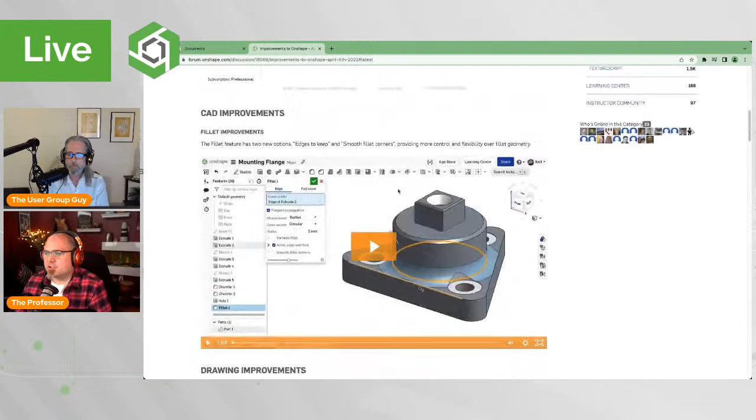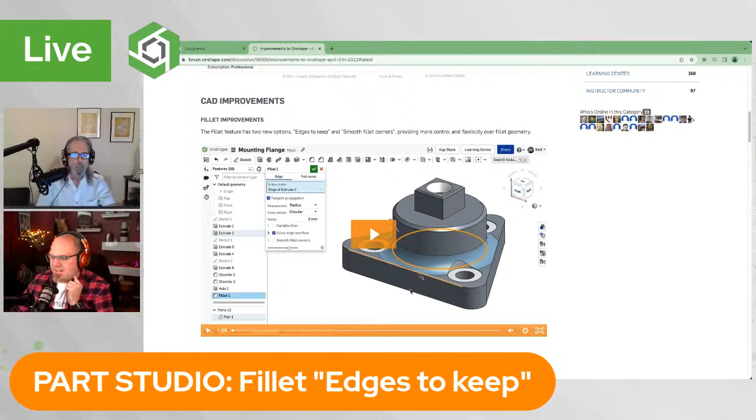There are two fillet improvements, not just one, but two fillet improvements in this release in our Part Studio. The first one is deciding which edges you want to keep in the event that your fillet falls off the edge. Like, if I zoom in over here and point where the mouse cursor is pointing, you can see kind of that little ledge popping up on front of Neil's part here.

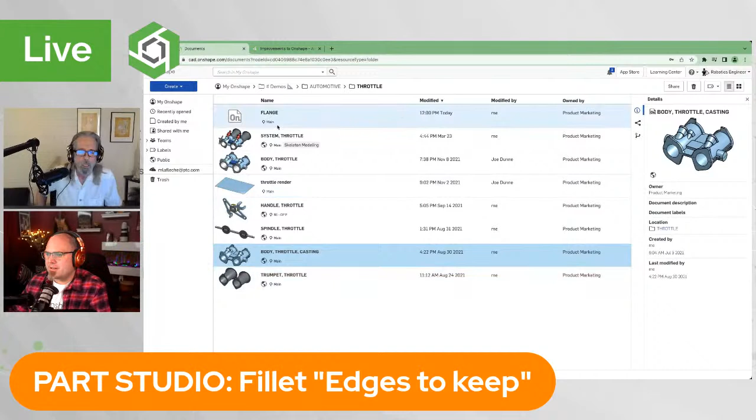And I can actually try to do this live, that way we can explain it just a little bit more. So here's my Onshape window, and I'm just going to create a very rapid flange here.

While you're doing that, Michael, there's a question in the comments: is there a limit on the number of subfolders? Not that I know of—I mean, you saw 19 there or something. I'd say it's limited by your sanity. It's something we can check on, but I guess don't do more than 20. If it's limited by sanity, I guess 2 subfolders is enough for me.

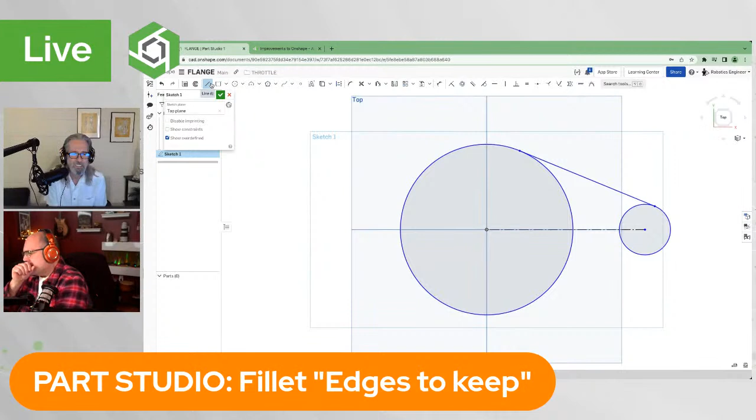Excuse me, it's like the first time I'm drawing in a CAD system here. Just give me a second. There we are, get it nice and trimmed up.

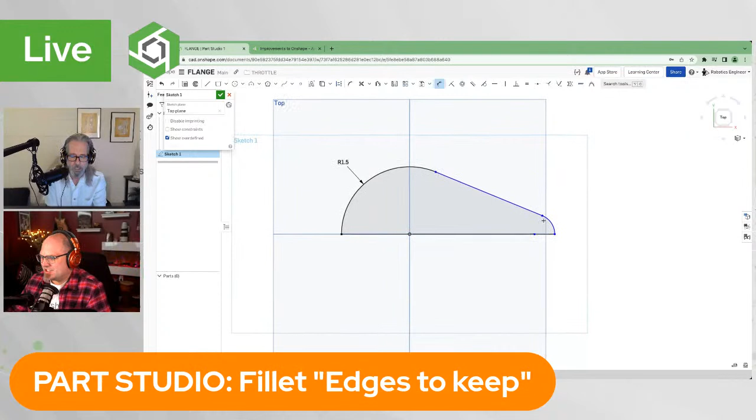One little trick, in case you haven't seen this before: the first dimension you put on scales the whole sketch down appropriately. All right, so that should be good enough for now.

I just want to create kind of an offset flange like that. I guess I'll mirror it this way since I didn't mirror it in the sketch. We'll just merge it all together. There we are, all right, good.

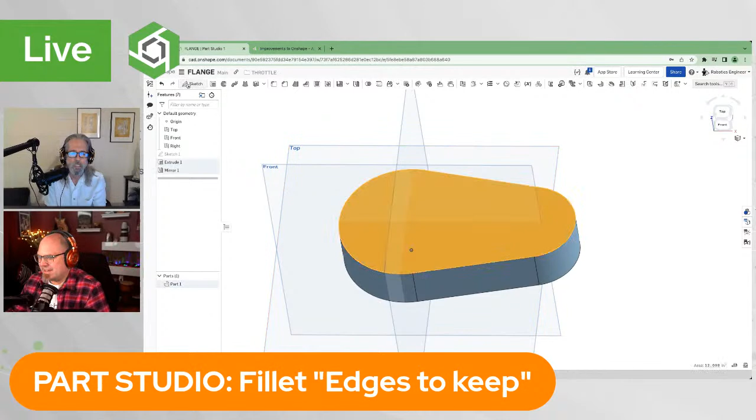One final thing I'll do here is put a flange on top of this, because what I want to show—I'll say that's 2—is what happens when you start placing your fillet. So if I go ahead and place a fillet here on this edge, you'll notice the fillet interface is slightly new, right? We have a couple of extra options here.

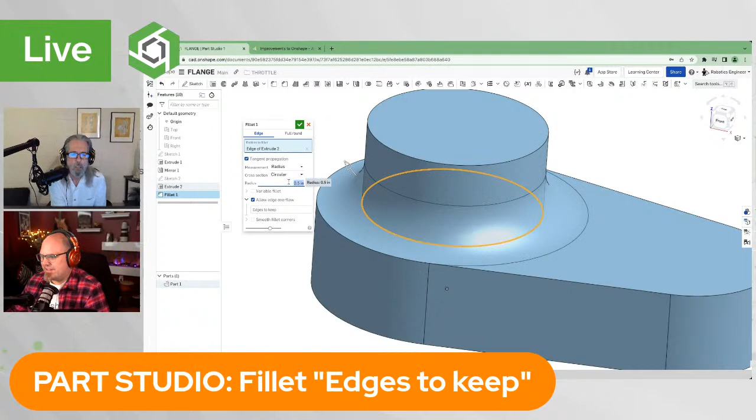Allow edge overflows here. So let's say I decide to pick that edge and give it a half inch. That's going to work nice. But if I go higher, you're going to see that overflow—here, that little pop up, right? And that might not be what you want.

So I want to keep this edge, and this edge, kind of flat. And you see what it did? Yep, right? Yeah, so that's nice.

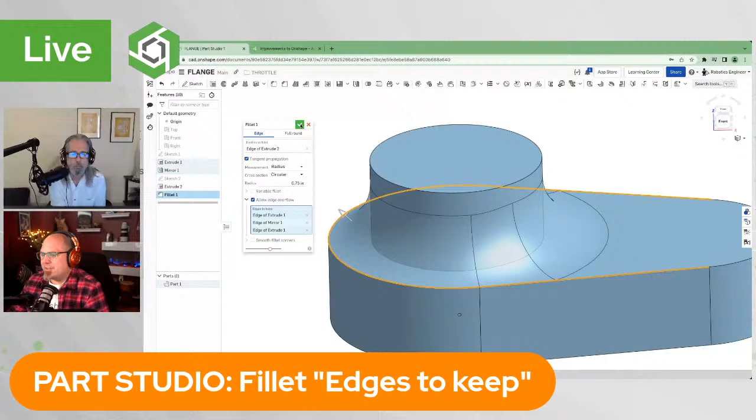Another option that we added was filleting the smooth corner. So let's imagine if we had, it's easily shown like this: if we had a rectangle, let's just call it a 1-inch rectangle, we'll make that equal and extrude that up.

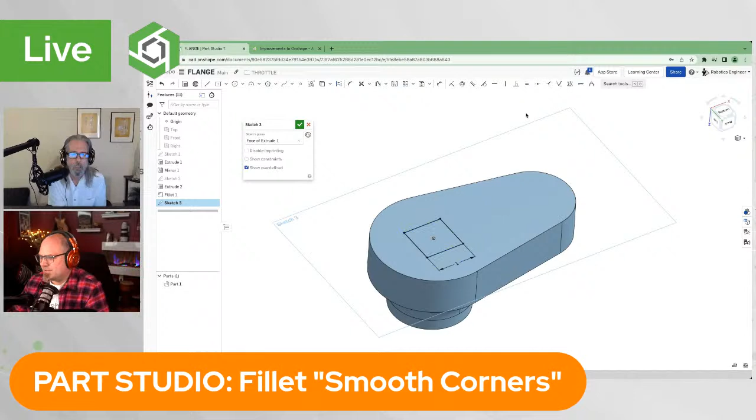So if we put fillet radius here and here, right, and let's just make that a little bit smaller. You notice how you'd have to take like a mill and come in one direction, and then have another setup in a mill in the other direction to get this shape, and you get this sharp corner where it might be better if you just took a tool and went around the corner.

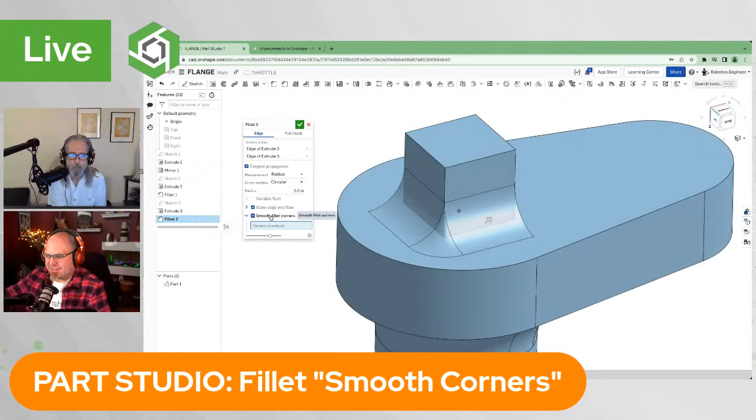Yeah, exactly, so that's a nice new option, right? I mean, obviously you could draw this before, but it would take a loft and several steps. But here it's just one kind of nice operation, right?

And you can even tell it which corners you want to exclude. So if you had a very complex set of fillet radii, you could. Wow, yeah, I hadn't seen that one earlier. That's nice too.

Yep, but the fillet tools received a lot of attention over the past few updates, over the last few months I would say, being able to do continuous fillets on complex intersections, being able to do some of these things in combination with conics and curvatures. Of course, the full round fillet is here.

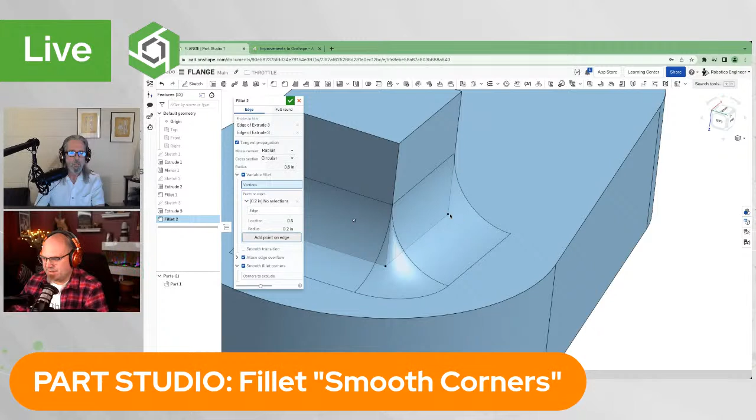The variable radius fillet received improvements where you could just pick, you could define locations along a particular edge, from a vertex. So there were all sorts of things, and the fillet tool just keeps getting better and better, right? Yep.

All right, what's next? And Sebastian likes the fillet update too. Oh, awesome, thanks Sebastian.

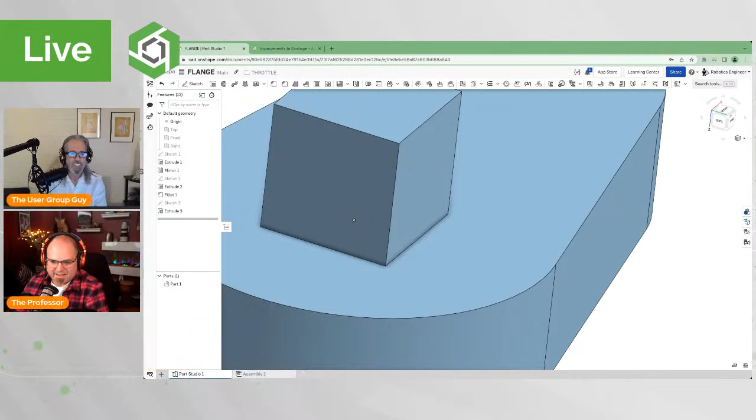The next update, let's see what is next in the list. There we go, we have a bunch of drawings things. So Richard, you're going to be really happy.

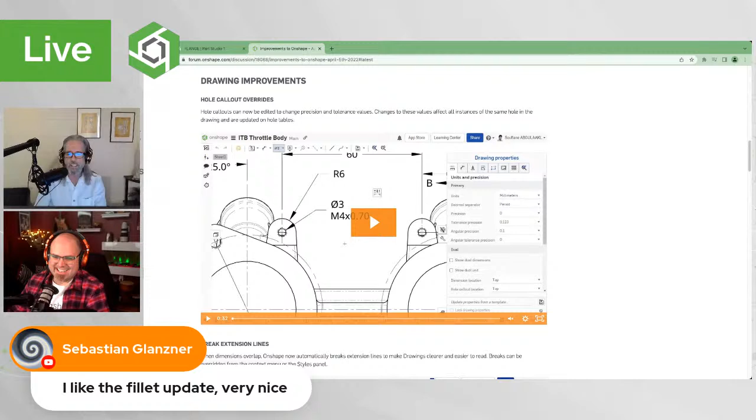Oh, I'm ecstatic, I went through all of these today. I've already tried out a couple of them and I'm really happy about that. I think I've mentioned before, I'm a big standards guy, and normally I wouldn't really appreciate the ability to override things, but people need that sometimes, and if we can provide that, then more power to us and more power to them.

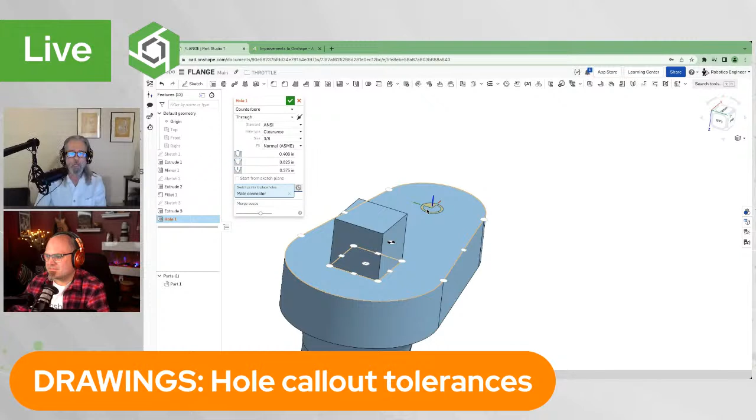Exactly, again overrides are something that I try to avoid, but sometimes they're unavoidable. Sometimes you need a little something special in your callouts.

So I have a flange here, right? Let's make a drawing of it, stick it on a piece of paper. And let's see, I love the 4-view option. Yeah, it's very nice. I think I need to get a view underneath here, the way I did this.

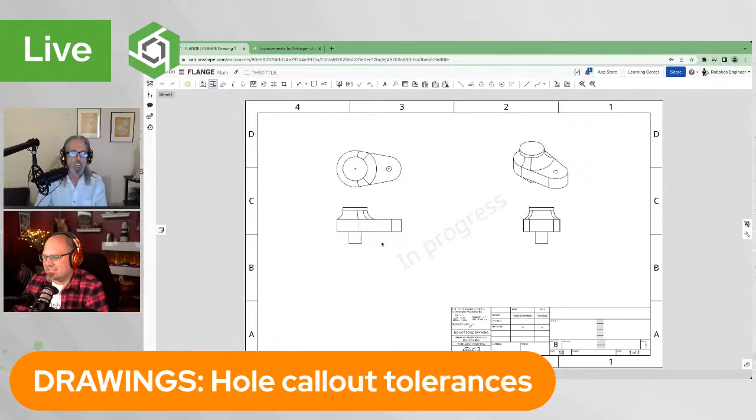All right, because I just dropped in a counterbore hole there, if you saw me do that. So when I put in that hole, Onshape's going to put in the standard default hole callout.

This is my first time doing this, so it's like one of these reaction videos. Let's go in and look - in this particular case, we need to have that counterbore a little bit deeper than 3/8 of an inch.

So what you want to do here is select any one of these numbers - see how I'm clicking in here? Let's say I want the diameter of 5/8 of an inch here to have a tolerance. Plus or minus - we'll say plus zero, minus 50. So being able to do that, you got that right there.

This is one of the highest requested items for the whole tool, being able to go in and specify the actual tolerance here.

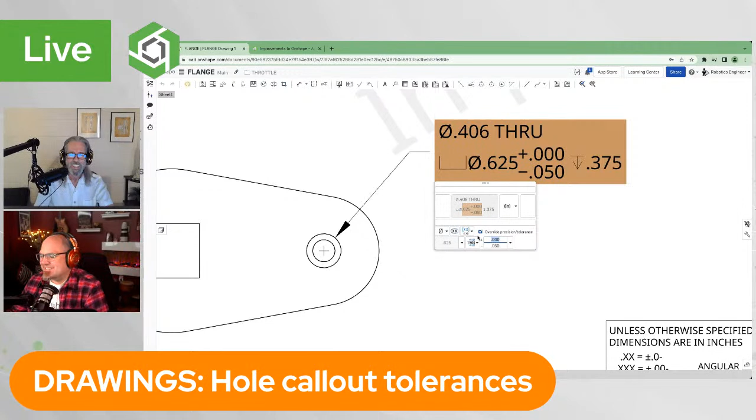This is going to be - you can obviously type in, let's see if I can... no, can't. Okay, but this is obviously a stepping stone into the direction of doing other things with tolerances in Onshape.

But here, this is huge, because machinists need to know exactly what the tolerance is. So let's put it back, but any number - pop open this, pop open that, and you have your choices right here. Symmetric, we'll just do 10.

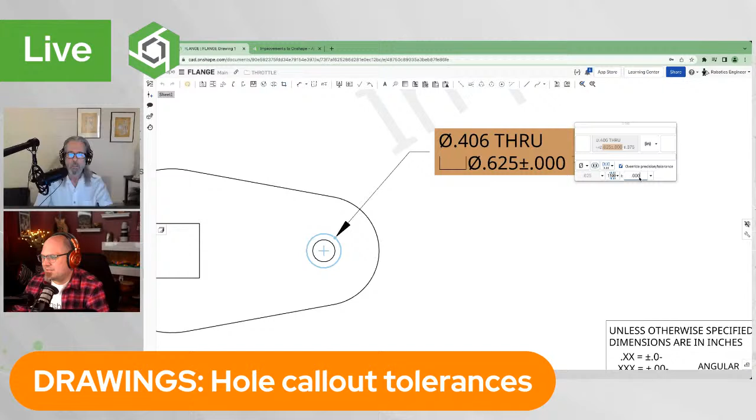Very nice. Another really nice thing, I think, and I'm going to start doing it, is breaking the dimension lines automatically.

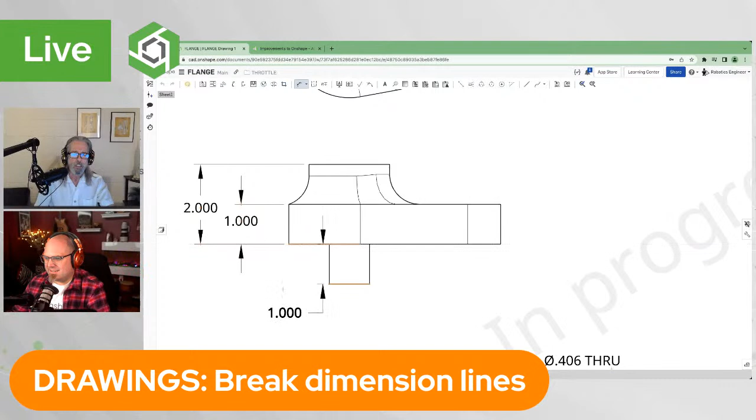When I saw that, my first thought goes back to the drawing board days and using my eraser shield to erase around arrowheads and create that little gap. So I was so happy to see this one - see that? Just went right in automatically.

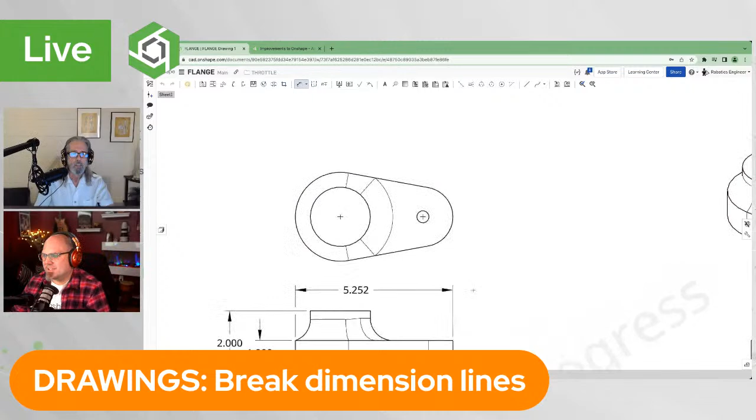Automatically, so it's just really nice. It'll work, obviously, if you have like a - let's do this, let's do a dimension from here to here, using a smart dimension here.

Just gonna try to get it to cross something. There we are - that's poor practice what I did there, but you can see it's working as you would expect. Now, let's say you didn't want a break for whatever reason.

You can right click on it and unbreak that dimension, and if you want to bring that back, you can break it. One thing to warn you - any of your old drawings, it's not going to automatically break existing dimensions. Just new dimensions will break. But on existing dimensions, if you do want to break them, you can toggle that right mouse setting.

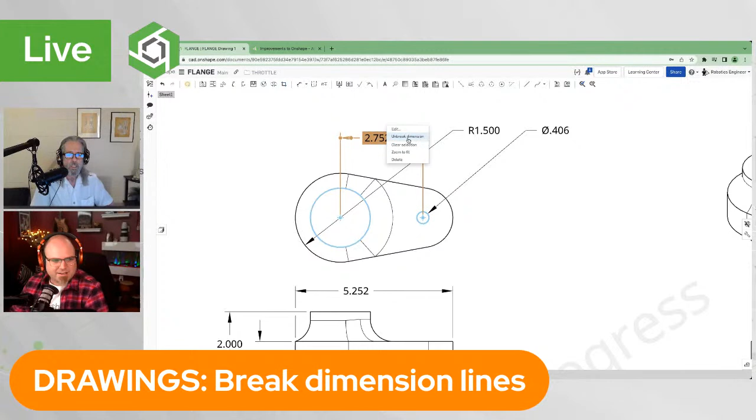I already tested that one out - called up an old drawing where I had a crossing line, and sure enough, right click, and it breaks it.

This is just one of those sticklery things, in that bucket of things like you need to have a nice looking drawing. This is one of the things that people will rate you on. And I find that these things are usually most important to the people that actually started as draftsmen or started on the drawing board, just those little things that you learn over the course of your career, and you're just really excited to see them when they pop up in your CAD system.

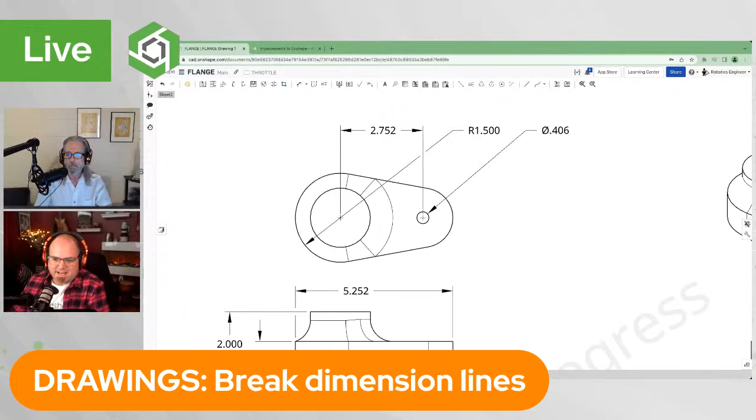And we've got another question on the break dimension lines - can you deactivate the auto breaking? I don't think so, so that is a good question. I don't think there's any options for that, but if you do feel like there should be an option for that, definitely, Sebastian, please submit a support ticket, right in here.

Let us know. Yeah, that's a good idea and something that I would support as well. I think it's not a bad idea.

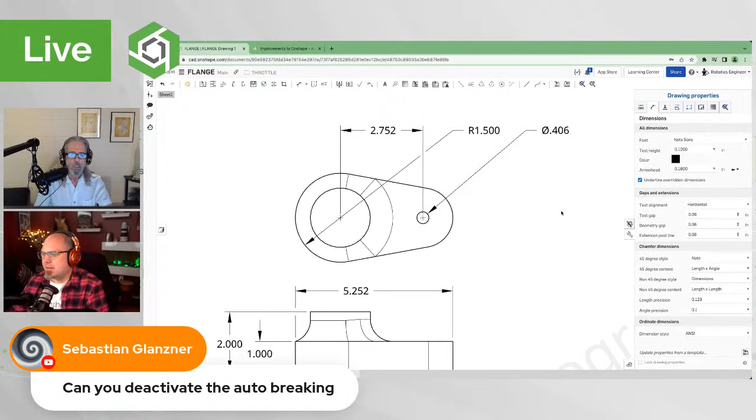We got independent arrow styles as well. So here we have this dimension. Let's see if I can find something interesting to use this on. You see, I can drag and drop that right there. It snaps in, but there's two arrowheads actually, one on top of the other, if you really think about it.

What you can do is go into your style settings and choose which thing you want to edit. If I go to the new style panel, which we added recently, you can see as I hover over each of those dimensions, we're getting a highlight as to which one we're looking at. So perhaps this one should not have an arrow.

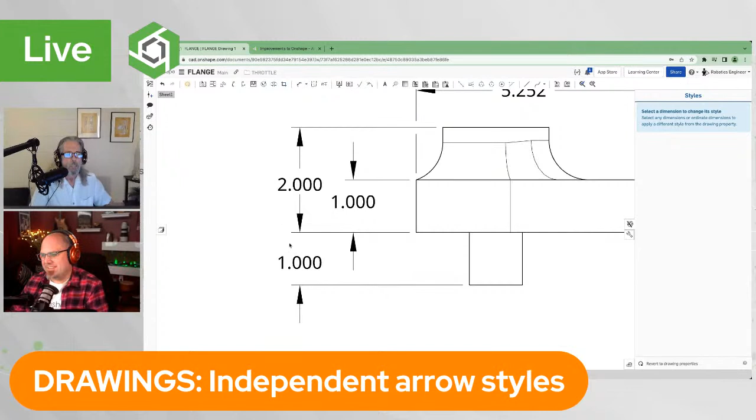I'm just thinking of my old pen plotter days in 1990 where you'd have double ink on top, and depending on the pen size you were using, if that thing went over it too many times, you might end up with a hole in your paper. Oh, those were the days. They were fun to watch.

But there's obviously opportunity for other interesting situations that may occur, where you need to have one arrow show up and one not, or one with a different style. You have all the other choices here for turning on and off extension lines as well, which I didn't even realize we had.

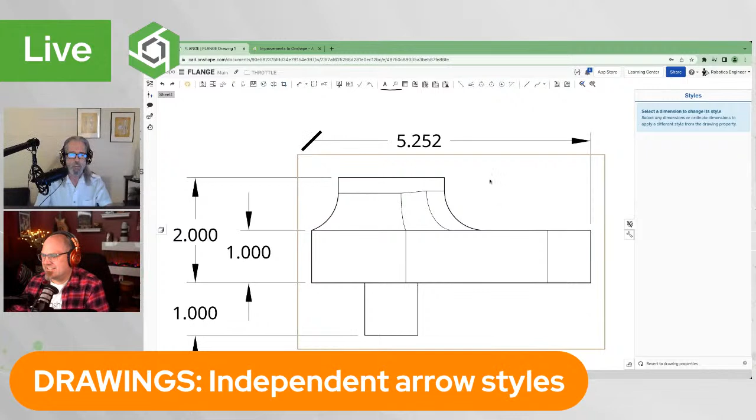I love the architectural style there. Yeah, exactly, good for the tiny house project.

Right here, we don't even need the extension line either. You can see it's doing the cross highlighting here as well, so I can just turn off that extension line if I was really a stickler for that. Pretty cool, beautiful drawing.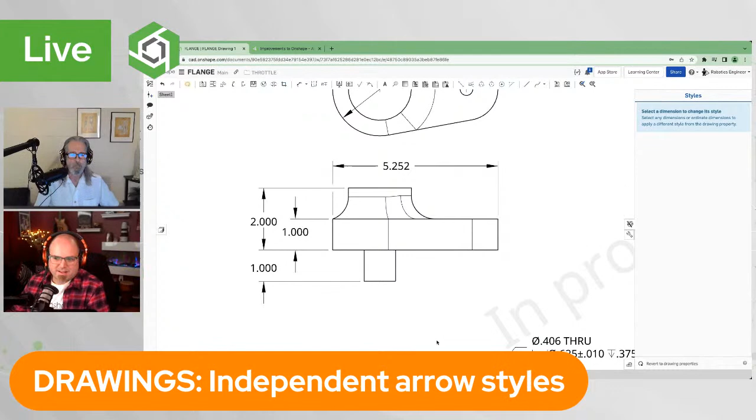Another thing about drawings is setting a proper row and height in tables. Let's see if I can make a quick table drawing here. I have an assembly with a bill of materials, with all my great information, and I want a bill of materials for that. In fact, let me stick in a new BOM because this probably hasn't updated yet.

So let's insert a standard bill of material. Oh, that's a whole table. There we are. I like my thing in the corner, top level, bottom to top. And of course, you can see that it's a little bit big. Now we have the ability to drag and drop this thing, and it does its best to get it right. I kind of like what it did.

No, that's great, and it's a good start. But maybe I know exactly the width and height I want for the maturity box. So I'm going to say I want it to be 25, and I'll just leave the height at 9 for now. You're able to specify exact numbers essentially.

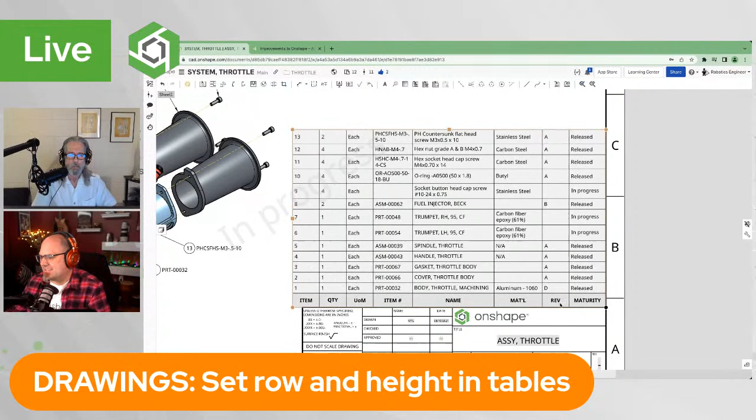And as you're dragging it, you'll actually see a number, supposedly. Yep, I saw that. Might be because I'm doing a screen share, I just saw it kind of quick come up on the screen. Yeah, you saw it real quick there.

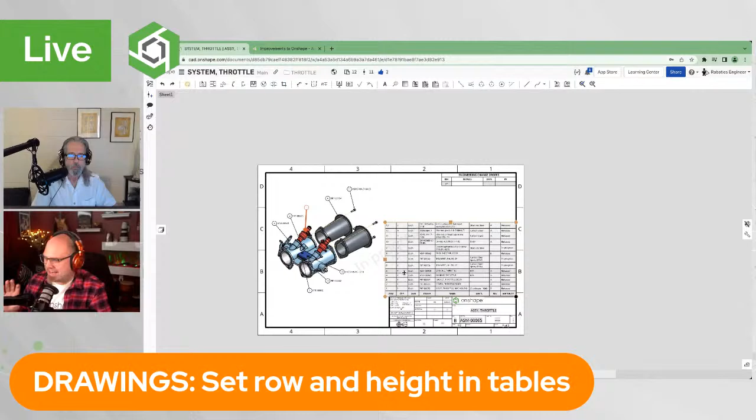Precision, that's what it's all about. People want to have their drawings just so. And if you're like me, you'll do this: you'll create this perfect bill of materials on 3 or 4 different drawings before you stop and say, I should create a template out of this. Exactly, that's another thing to think about.

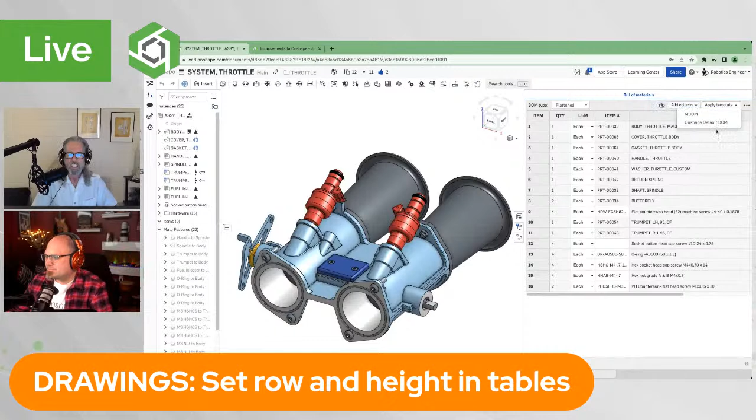We obviously have the templates here, for the content of the bill of materials, but then what shows on the drawing can have slightly varying widths and things like that, but it will respect exactly what you defined in the model.

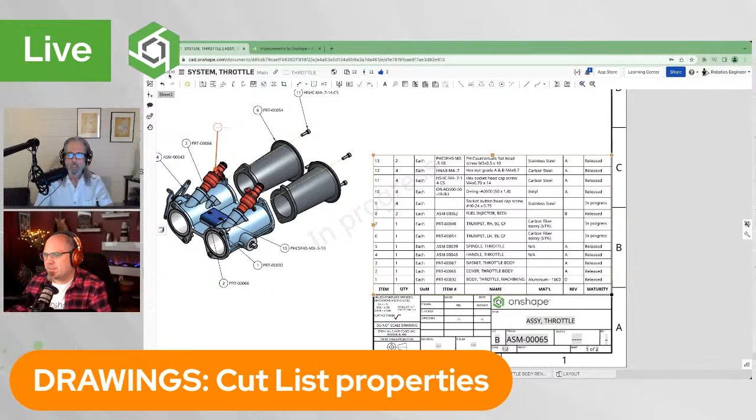Another thing relating to tables is, last update we did the cut list with the welded frames and things like that. When you create a welded frame in Onshape, let's see if I have one—maybe not in this particular account. I'll just go over here. Yeah, so over here, if you take a look, there are some new cut list table properties.

Just so, like, when you insert a new cut list table, just like you insert a bill of materials, a whole table, you want it formatted the same way every single time, like a template, if you will. So that will be part of this. Of course, all these drawing properties are part of your drawing template when you create them in Onshape.

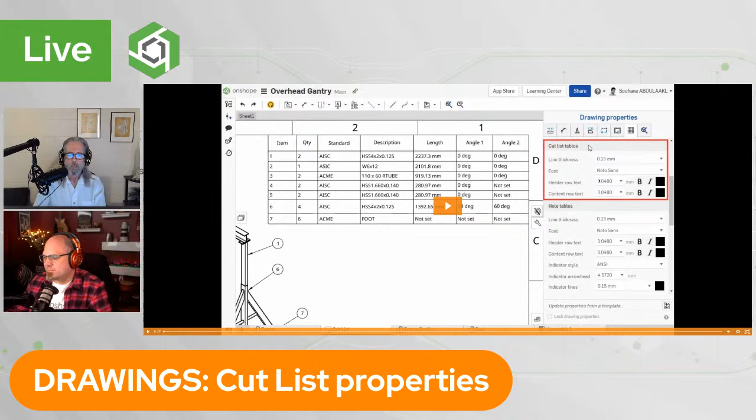So if you set this exactly the way you want and you want to use it over and over again, it's part of your template file for your drafting sheet. It's really relating to the drafting template using the DWT file that gets generated. But essentially, this is the thing we've added: the ability to set that in a template-based way. We're happy to have that.

Let's see. Let's go to my other account here. Got an enterprise account, so let's sign into that. Just give me a second. There we are. I'll log on as Mike the manager.

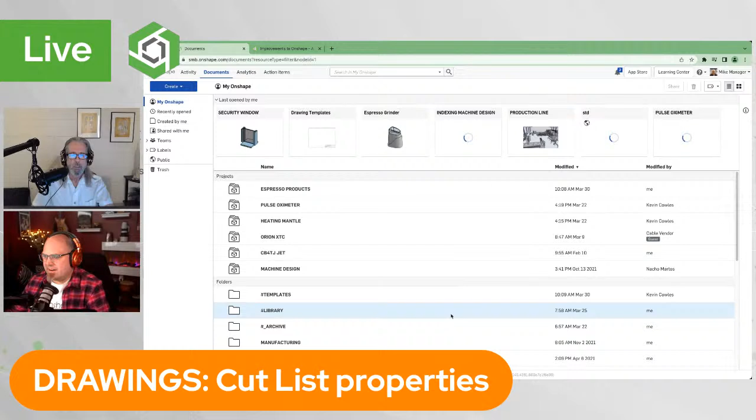All right. So here in my enterprise account, we have had for quite some time the enterprise dashboards, which you can find under analytics. And this gives you insight into your business, like what's going on in your company, types, how long has this project been active for, what's waiting for release. And you'll notice that we did a refresh on the interface of this. It's much easier to read, especially for somebody like me.

I've noticed that the contrast is better between the colors. And somebody like me, I'm colorblind, so I actually had a little bit of a hard time seeing the nice muted tones of the previous version of the reports. But this is clear as day to me. So I can easily see the differences between the colors, and you can see that they've taken a different approach on the UI, with these boxes that are floating above, and they have a shadow and everything. So it's a nicer way of looking at it.

I think I'll just dive into a dashboard. Yep. This is the first time I'm seeing any of these with my demonstration account that I've set up here. Yeah, I don't have an enterprise account, so this is a first for me. Oh, well, I can add you to mine, Richard. It's pretty easy.

But I've been working on this machine design project for 500 hours. Wow. Yeah, so this is where we've been working over the past 30 days. These are who's been working. My colleagues Leonis and Jess have been in there. So it's cool to see it. It just pops off the screen better. So even though this seemed like a minor update, for me it was a huge update because now I can actually read this thing. I didn't know if that was an intended effect, but I'm going to appreciate it right now.

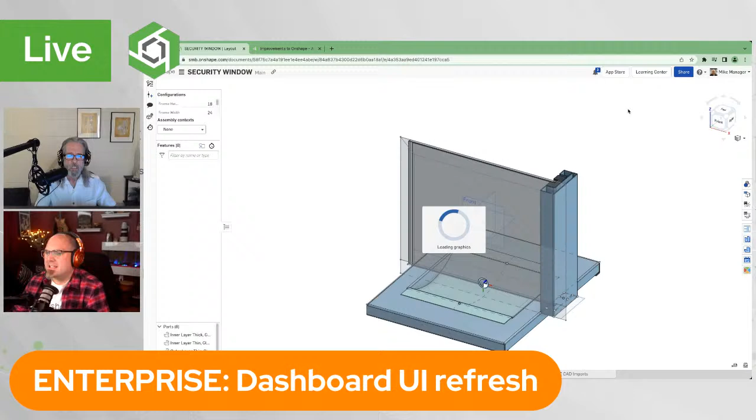FeatureScript. Any FeatureScript folks in the house? Let's talk about some really cool things here. I wonder if the sensor value is a public one here. Let me see if I can add that to my account. Just open up a document here. Go over here to a part studio. That's what I'm looking for. All right, this is my security window example. And let's search for sensors in public.

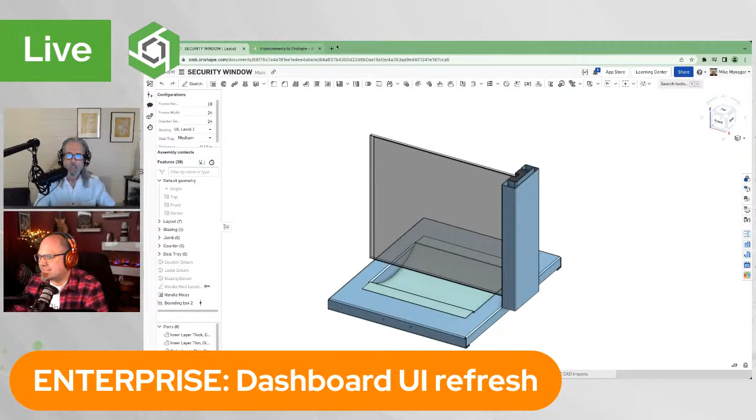I'm not sure that's what I'm looking for, but let's do one other thing. If not, I can show you what it does. All right. I know there's a sensor in here somewhere. Maybe I don't have it on the public page. All right. At any rate.

Table parameter groups and conditional visibility. So essentially in a custom table now, as you can see in this GIF animation here, you can open up an optional filter category that you can set up in your code in custom features. So that way you can use those parameter groups in the interface of your custom table to allow end users who are accessing this custom table to sort it in the way they wish.

The other thing that they did in this that's even more exciting, I think, is that you can control the visibility of certain parameters with another parameter. So this gives you that conditional logic when creating your custom feature. I don't have an example to show you right now, but if anybody does, definitely post it to the forums. If I find one, I'll share it as well. But this is definitely a big deal if you're into creating custom features. The visibility of the parameters can be controlled based on another parameter, which is really powerful.

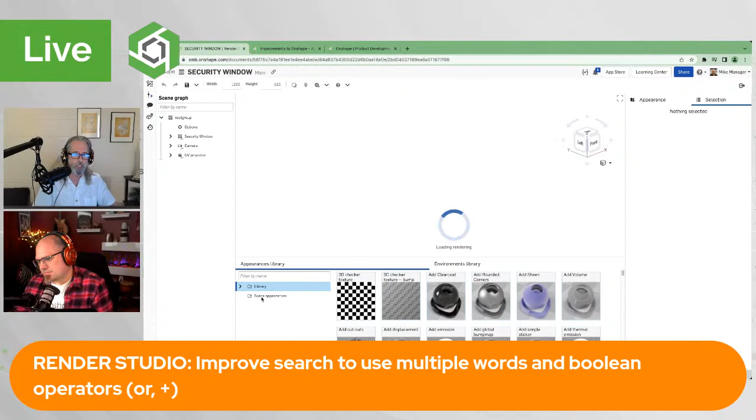But the ability to go over and filter in my tree, to filter by 2x4, for instance, then I can select them all at once and apply the appearance that I want. And so the addition of multiple words, Boolean operators, or, and, that's going to be just enormously more helpful. Yeah. Here's tile green. So I just did tile space GR, and I remember that would be kind of a hard thing to find before, but now it's showing up. So yeah, I guess that's good.

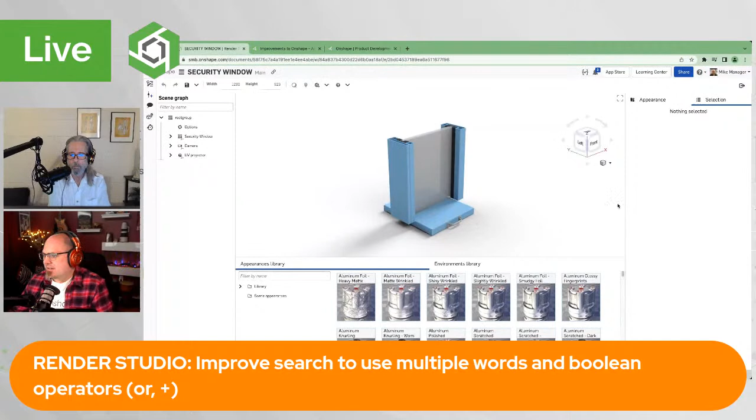I like it. There's some other things behind the scenes, different rendering models that are available, but then the other kind of major thing, I believe, is the, let's see if this works. I'm going to do a quick test before I show the real world here. Let's see. It is Alt-Shift-Click. Let's try that.

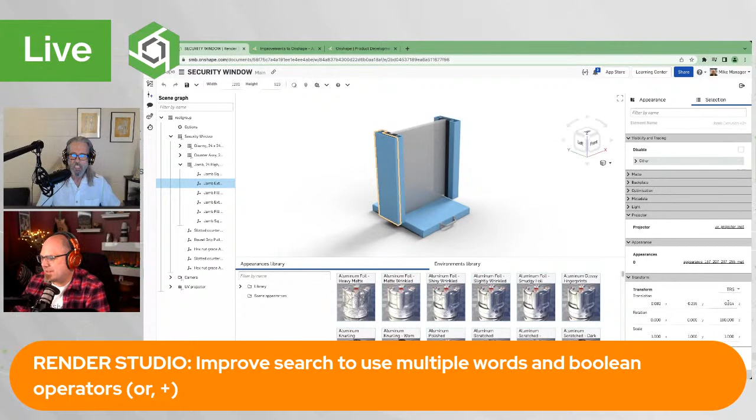Command probably on a Mac. I might have to figure that one out. All right, I'm not going to show it. Were you going to try to move something, Mike? I was actually trying to move something, right? So right here you have the ability to move something. Yep. Like I could translate this, and here's the X direction, right? I can say I want to move it over 5 inches, and it's probably way over there now. But yep. Yeah, that was a nice addition. That was the last release, right? Exactly. So we did that, and yeah, I think that's all I'm going to show right now for that.